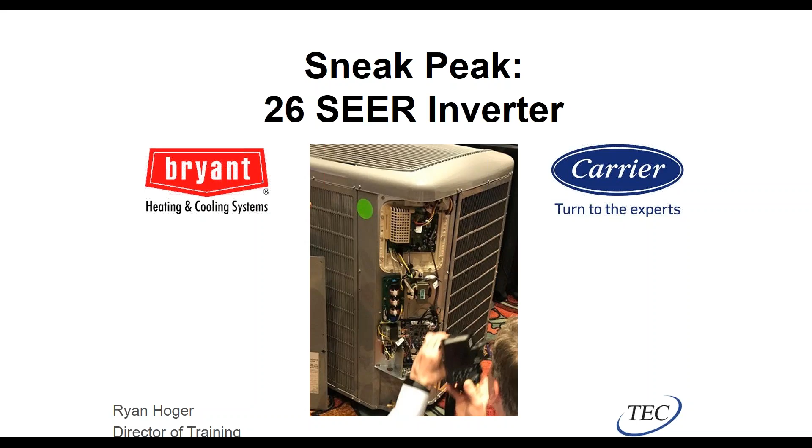So why variable speed to begin with? Well, variable speed is not new to us, we've been doing it for a while. I think this is year 9 of us having residential variable speed split systems. But the main primary purpose of it is to get better comfort. We'll explain why that is and how that evolves.

But your house does not see the exact same outdoor temperature every day. It doesn't have the same internal loads every day. Things are constantly changing. So why wouldn't you want the air conditioning system to match the loads as they change, to give you the exact amount of temperature and dehumidification comfort that you need at that moment in time?

So traditional systems, whether they're 1 or 2 stage compressors, are only right at full capacity at 2 moments in time, and that's when you're at 100% of design, which almost never happens. And then when you're on stage 1 of a 2-stage compressor, it's usually 67 to say 71% of full capacity. So at that moment in time, you're correct.

But instead of 2 stages, if you could have 4, 5, 10, 50, 60 stages, the more stages you have, the more tight your control would be. At some point with enough stages, we stop saying stages and just call it variable -- when I say we, the industry does that. I still tell the number of stages because that's what I like to do. But once we get above 3 stages, it's technically called variable speed compression.

We'll have better, tighter temperature control, lower indoor humidity for the reasons we'll explain as we get into this. And we'll actually have longer longevity -- that's a brilliant way to say it. We'll have longevity because we'll have less wear and tear on the components.

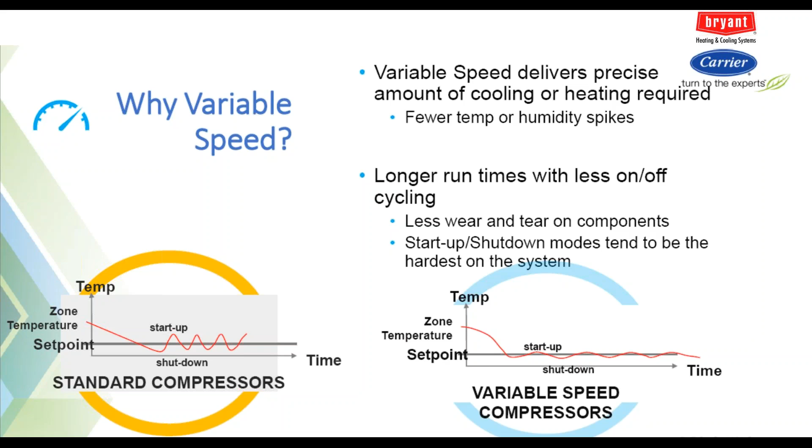The humidity control is actually a big thing as well. The more stages of capacity that we have, the less likely we have to turn the system off. And as you're probably aware, your system is only dehumidifying when it's actually running. So if you've got a fairly oversized system, like everyone in America, and it's only 1 or 2 stages, when it kicks on, the first 3, 4, 5 minutes, there's no condensate, there's no moisture running off your evaporator coil.

It takes time to get the evaporator coil down to the dew point of the air and then start pulling moisture out. But when you only have 1 stage or even 2 stages and you bang them on and it satisfies the thermostat pretty quickly and shuts right off, you didn't have enough time to get a decent amount of dehumidification. If you only ran for 5 minutes, you only dehumidified that last minute. So by having more stages and full variable capacity, we can keep the machine running and hence keep the evaporator coil wet constantly and pull more moisture out of the air.

The lower the humidity you can maintain in your building in the summertime hours, the higher the temperature you'll be comfortable at. Most of you guys, based on polling my live classes, probably keep your thermostat in the summer set on 72, seems to be average. Sometimes guys in class will say 70 or 67. I had one dude say 62 a couple weeks ago, which is crazy. My house, we keep it on 77, which may sound high, but it's not hot in my house at all.

My family is pretty warm in general. Three of my four kids are always complaining that they're hot. My wife doesn't really wear closed-toed shoes, she wears flip-flops in the winter. They're always hot. And at 77, no one is complaining at all because we do such an active job of dehumidifying the house.

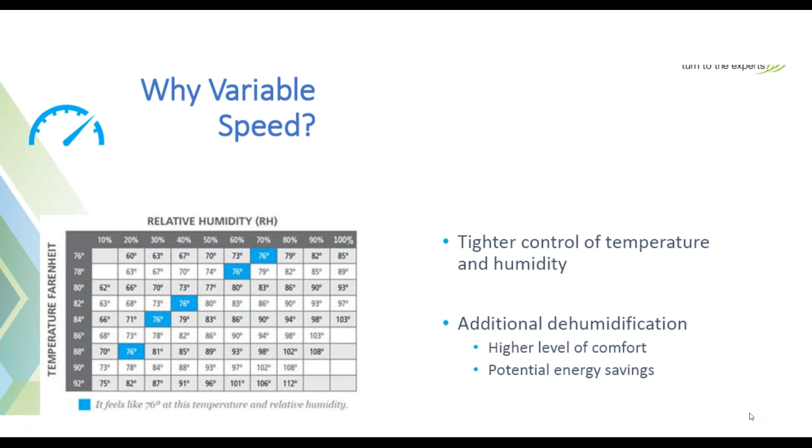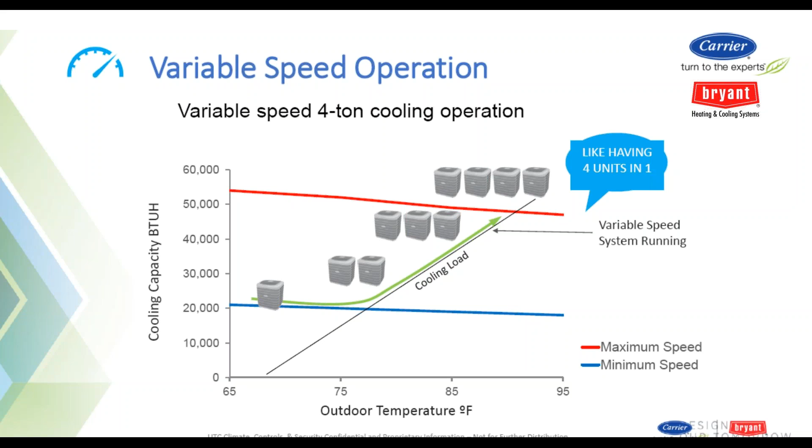You probably have seen graphs like this before because we've used them with other variable speed compression products we've had in the past, but this is one of the ways we explain it to consumers. If you just had one compressor, one condensing unit, it's on or it's off - it's not going to ever match exactly what you need. But if you had variable speed, or in this example, 4 stages of cooling on a 4-ton system, each stage being 1 ton, you've got a pretty good opportunity to match up the actual needs of your house. It's like if you had a big system, a medium system, a smaller system, and then a little tiny baby system, and you turn on whichever one you needed for that moment in time. That's the idea there.

Dehumidification, like I said, is huge. These systems can remove 400% more latent moisture from the air than any of the other systems that we have. We have a pretty low turn down on these new units that you're going to see - it's better than our 2 current variable speed products. So what I mean by that, we've had the variable speed Greenspeed systems since 2011 on the heat pump and then the AC a couple years ago. Those guys go from 40 to 100% in 1% increments.

Then more recently, maybe 4-ish years ago, we came out with the smaller inverter unit, which we also call the 5-stage unit. That guy has a better turn down - he goes down to 25%, but he only has 5 stages. So we have a 5-stage that goes down to 25%, and a 61-stage that goes down to 40%. The new one we're going to show you today is better than both of those.

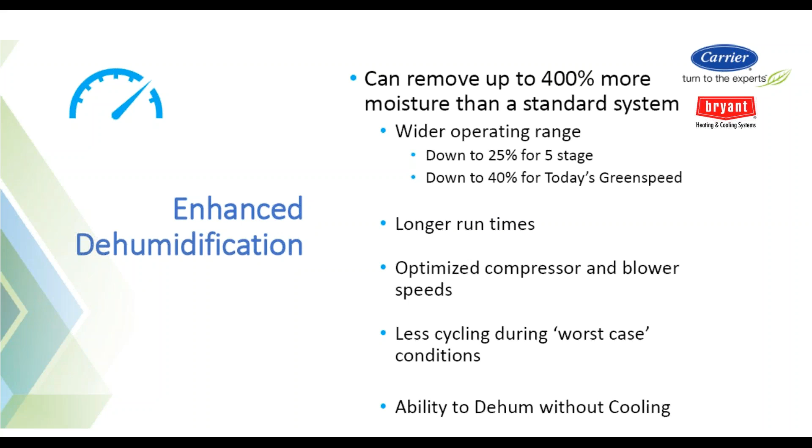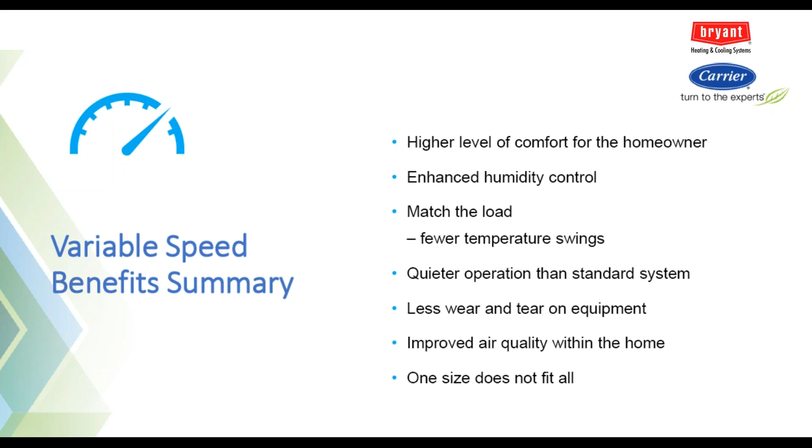The more staging capacity we have, the longer run times, optimized compressor, dehumidify without cooling is functionality that we have. We can do all those things you're used to doing on these really high-end systems we've worked with you guys on in the past. We're trying to match the load exactly for the customer - one size does not fit all. We can improve the humidity, improve the air quality, improve the temperature, be ultra quiet in that process. So we'll get on with that so you guys can see exactly how that works. Like I said, it's not new.

In 2011, we started doing variable speeds, traditional split systems with Carrier and Bryant, and it's kind of grown from there. We've had one in our Melrose Park lab since 2011, and obviously we have them in all of our labs now as well. This new unit that we're going to talk about today, the process to develop it actually started in 2016. That tells you the R&D cycle of some of these projects, for the engineers to develop this technology and figure out how to do everything the way they want and come out with something better than they came out with 5 years earlier.

So that's a 4-year process in this case to take it from birth to actual production of the product, which should come out here in the next month or so. My fingers are literally crossed as I'm telling you that. The way the country is going right now, I don't know how fast things are going to start shipping around the country.

But when they look at these processes, we've had some issues with some of the 61-stage inverters in the past when they first launched, the growing pains, if you will. So they looked at all that warranty data. They did all the what we call voice of the customer, where we, meaning the factory, talks to a large quantity of contractors that have had issues. Say, hey, what do you like? What do you not like? What went wrong? Why did this happen? And they try to collect all that data and then say, hey, what can we do to fix all that stuff? Because we want to launch the next thing without any pain.

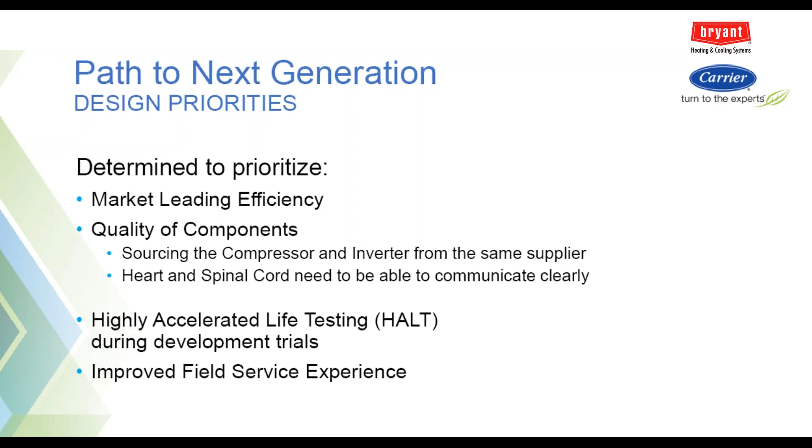They specifically have this chamber that basically beats the crap out of stuff. So they stick stuff in the chamber, whether it's the inverter that they're coming up with or the circuit board or whatever it is, and this thing shakes it to death and cooks it and freezes it and slaps it around, gives it really, really crappy power, and then they see not only if it's going to be able to survive for a certain amount of time, but they just keep testing it and testing it until it eventually fails, which is kind of unique. It probably is a really fun job to have. You just get to break everything.

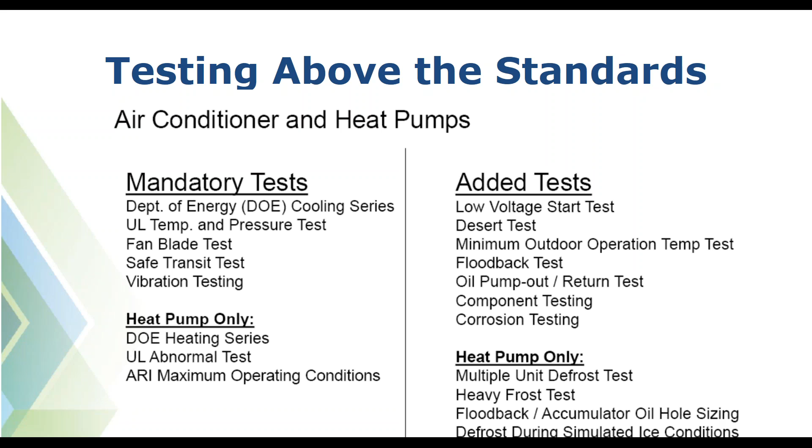But they keep testing it until it fails, find out which piece failed, make that piece better, test it again, test it till it fails, find the broken piece, fix that, keep on going until you've got most of these pieces being very durable. So they do all kinds of testing for Bryant stuff and Carrier stuff that's well beyond what the regular scope of the standards would include. And this is just a list of that stuff that they do on the equipment that they don't have to do, that they choose to do.

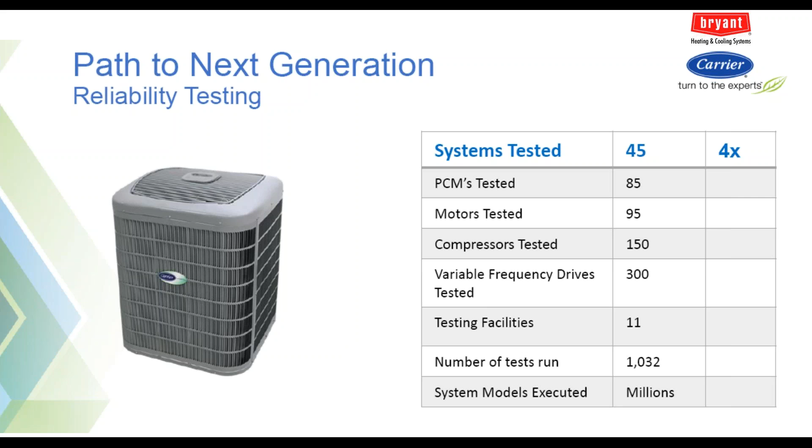In the case of this new unit that we're talking about, this just gives you an idea of some of the components that were tested before they even came out with the beta units. So how many units were tested, where they were tested, VFDs, which are the inverters. They tested 300 different ones, 300 different tests they ran on different units to test that out, just to see, because that's a concern, because that's the most expensive piece in the thing, obviously. So they want to make sure that that's all functioning correctly.

The SEER, as you probably know, is up to 26 SEER on the cooling models and 24 SEER on the heat pumps. You guys know the deal with the up to, right? We'll explain that again for those that don't know, but we'll go into that in a little bit. It'll have better dehumidification than the previous product, and better dehumidification than any other product in the market.

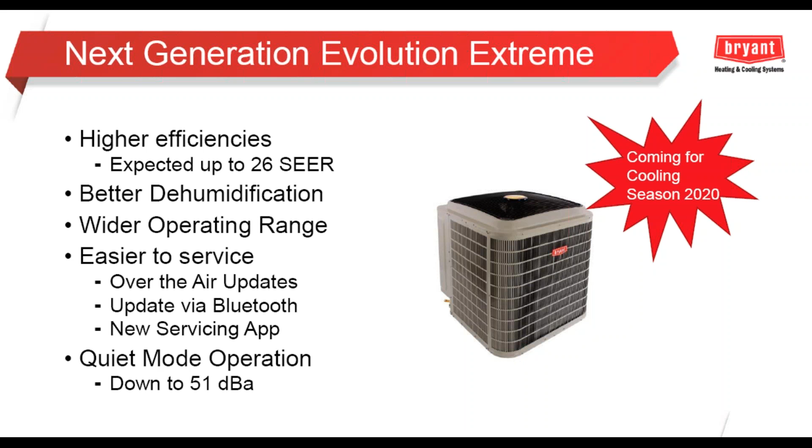We'll have a wider operating range than we ever had before, and lots of features coming on the service side to make things even better. And then my favorite thing is it's even quieter than anything we or anybody else has. It is freaky quiet, and we'll explain that for you guys too.

Like I said, on the Carrier side, it's called Infinity Green Speed, so you should be used to those marketing names. The cabinets, you'll probably notice, are physically the same cabinets that we had on the old ones. It's all the stuff inside that's physically changing, and there's lots of stuff changing, but the cabinets and the visual look are what you guys are used to on the current product lines.

So what's the lineup going to look like once the new units come out? The 21 SEER will phase out for the AC, and the 20 SEER on the heat pump side will phase out, and it'll be replaced by these 26 and 24 SEER models that we have highlighted in red.

So on the Evolution or Infinity side of the equation, we'll have the same basic lineup. We'll have the single stage Infinity Evolution, which is stupid—don't anybody buy that, I don't know why you would buy a high-end thing and only get one stage. Then you have the 2-stage models that we have had in the past. And then you have the 5-stage inverter, 24 VNA9 and 189 BNV.

And then we have these new ones. So on the Carrier side, it'll be 24 VNA6, where the 6 stands for 26 SEER. That'll be a little bit confusing because historically a 6 means 16, but now the 6 will mean 26 SEER—we've surpassed the 20 number, right? And on the Bryant side, it's the 186 CNV model number.

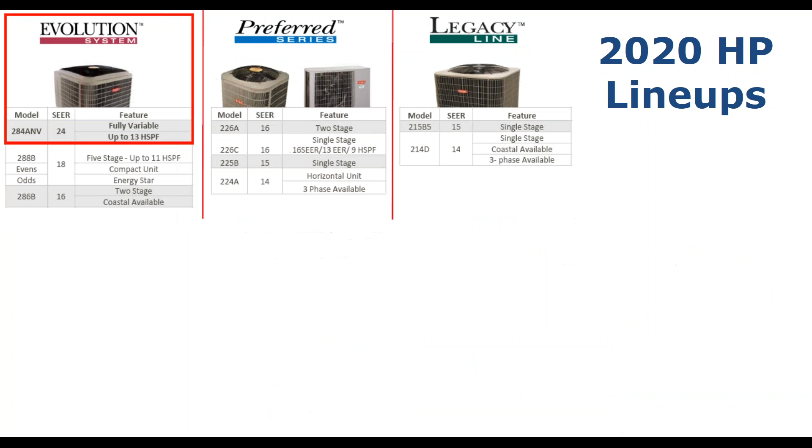Heat pumps, same kind of story—those go up to 24 SEER. I know we don't do a ton of heat pumps in this market, but we do a fair amount here in the greater Chicagoland area and Northwest Indiana. But those will be the model numbers you'll have for the heat pump side.

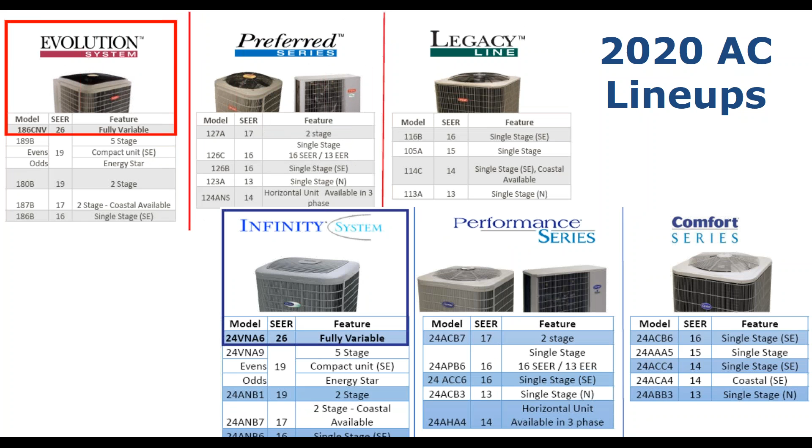For Carrier, heat pumps always start with 25, so 25 VNA4. By the way, the V means variable compression, N means infinity—we don't use I for infinity because I's in model numbers suck. So 25 variable infinity A version 4, 24 SEER. And on the Bryant side, the 2 at the beginning of the part number means it's a heat pump, whereas the 1 meant it was a straight AC. So 284—8 means Evolution, 4 means 24 SEER, and so on down the part number.

So some of the ratings you're going to see on these units when you look on the AHRI directory—obviously the rating is a function of the condensing unit, the evaporator coil, and the fan system, meaning fan coil or furnace. So you'll have different ratings for different combinations.

And like all other products we've had in the past, and all the competitors' products, when we say it's a 26 SEER unit, that means up to 26 SEER. Just like right now, when we say it's a 16 SEER unit, it means up to 16 SEER—certain combinations will hit that, some won't. Usually it's easier to hit these ratings on the fan coil side and on the 80% furnaces. The 90s are a little harder to get the high SEER because of the restriction of the heat exchanger, the second heat exchanger, to push air through.

But what I want to point out on some of these ratings—there's two things actually. One is not only is the SEER rating pretty high, the EER is pretty high too, which compared to our 5-stage units is a big plus. The 5-stage units are really small, really compact, have nice high efficiency—19 SEER in those cases—but they don't really have great EER.

It's not a big deal usually because high EER means you're at full load, and full load almost never happens, so who cares? But if you stick around to the very end of this presentation today, you'll see why high EER is going to matter again, and why you're going to want to look at this unit.

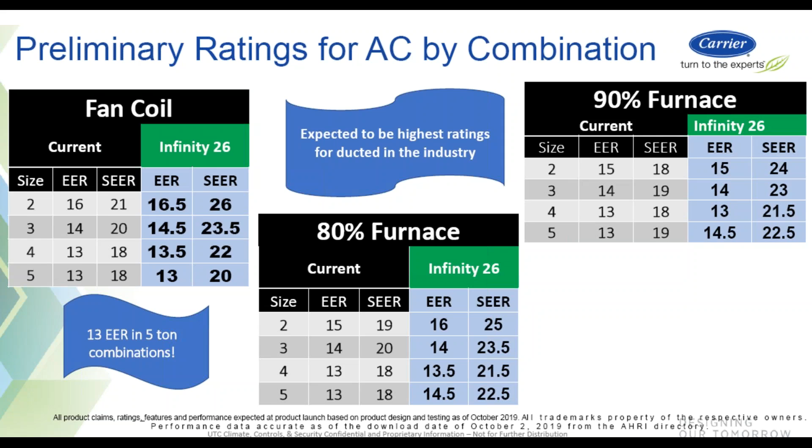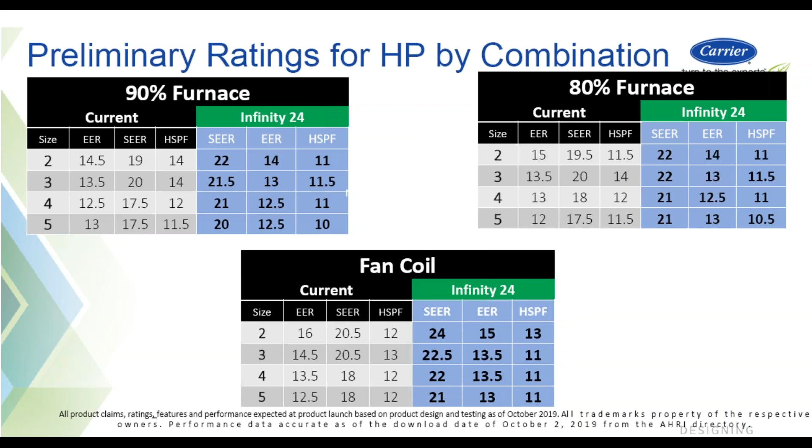So the 5-ton unit I mentioned is different than all of the other units. The 5-ton has a brand new feature called vapor injection. This is not something anybody else has had in the past—I'm sure eventually they will, because that's how things go. But that's going to be the big difference here on why we can have the 5-ton be so much more efficient than we've had in the past, and even more efficient than the 4-ton model, which is crazy.

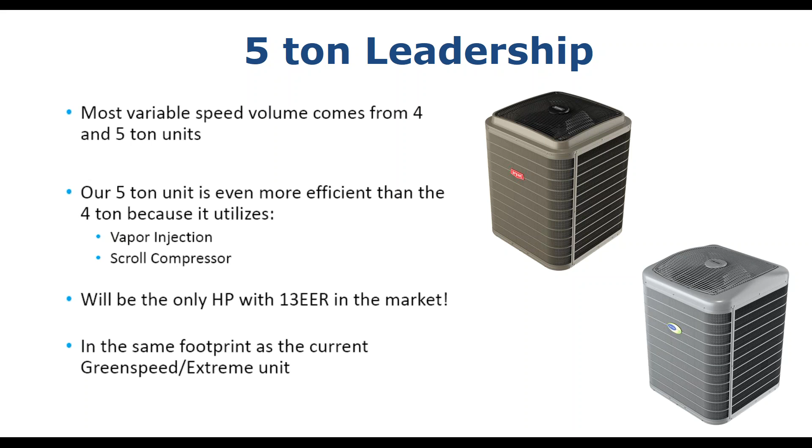Generally what we do is put the 4 and 5-ton in the same unit and just overspeed one and underspeed the other, but that's different in this case. So we get some pretty high efficiencies here.

So here's the quickie version of how this vapor injection works. There's an extra piping route on here, if you will. So if you follow along with me, we put numbers on here so you can try to follow along, since I can't physically show you one in the lab today.

What we're going to do is, coming off of the condenser coil, we're going to grab some of that subcooled refrigerant, not all of it, just a portion. That subcooled refrigerant, we're going to pull it off into a separate line, and it's going to go through an expansion valve, which is obviously going to force the pressure to change.

And as you know, PV equals nRT, so when we change the pressure, we're going to change the temperature of that fluid going through and transform it into a liquid vapor mix, then it passes to the heat exchanger where we can cool the other refrigerant that didn't go through there, if you will. Then we send it back to the compressor and inject it back in again.

And in yellow there, the rest of the refrigerant goes into the house to the rest of the system. In blue on the top right is where the refrigerant is coming back from the house. There's going to be more details as we dive into this.

We also have a video that we're going to share with you guys as soon as the factory says we can release the video to explain how this works. And then obviously we're going to have technician training for this because it's different.

Anytime there's something different, you can't just throw it out there because people will freak out. So we have some additional training coming to help with the technician side of the equation. But this is the reason why we're able to get to that higher efficiency level with the 5-ton unit.

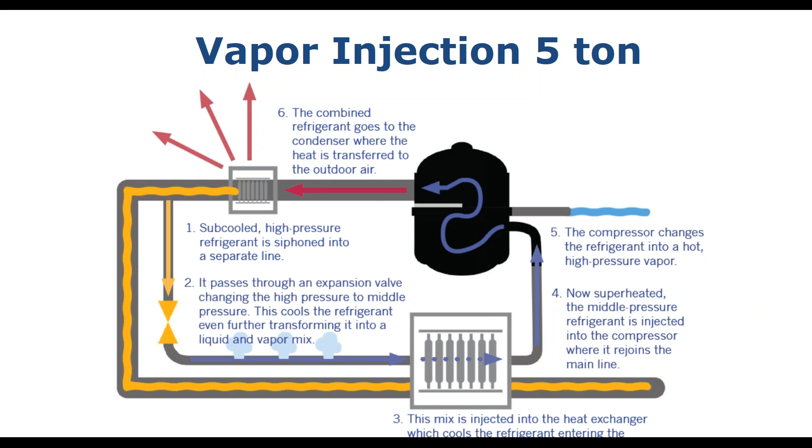I mentioned the dehumidification being better than standard systems, and it's even better than all of our previous systems. Compared to a traditional 13 SEER single stage unit, it's 400% more dehumidification than we had. Compared to the normal test conditions for the AHAM, it's 70% more removal. And compared to our current Greenspeed unit, the quote-unquote 6-stage unit we've had since 2011, it's 30% more than that.

And that guy was a beast. He was a good dehumidifier. I'm saying it like he's dead. We still got it for a few more months, right?

But it's a lot of dehumidification removal. If you put in a dehumidifier when you have this unit, there's definitely something wrong. In fact, if you did it on the old one, there's something wrong. You need to talk to me, and we need to figure out what's going on with your house. In our climate, you should not need a dehumidifier and a Greenspeed Extreme type unit. It's one or the other.

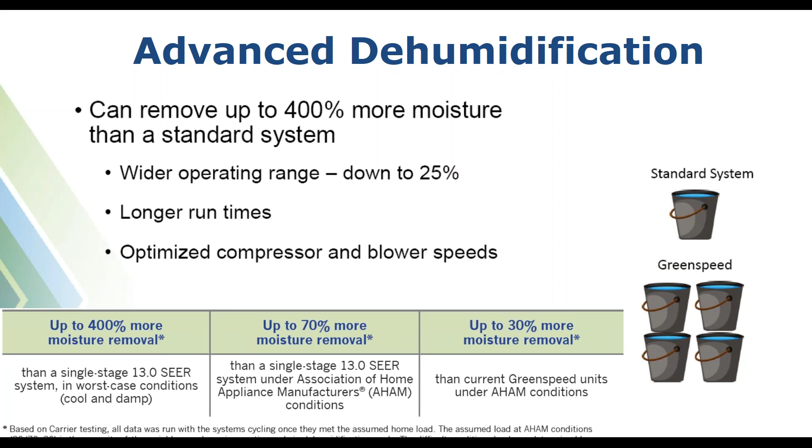The sound levels are another huge improvement on this unit, and some of the things that help out with sound we've had for quite some time. I'm sure you're all familiar with the forward swept blades, or as my kids call them, the Batman blades. I'm not sure why, because there's only 3 of them, but that's what they call it. We have those same forward swept blades which reduce sound, and it has that silencer top where the shroud curves inward, which also helps reduce sound.

We have compressor blankets, which a lot of manufacturers use to reduce sound. We still have the split post grommets for the compressor base. Think of it this way: there's a post on all 4 sides of the compressor, and that post does not go into the bottom of the cabinet. It goes into a rubber grommet, and the other side of the grommet connects to another post that goes into the cabinet—like a little mini shock absorber. We have those 4 posts, shown in the bottom left corner of my slide, and the plate they're mounted to is laminated, so if there's any metal touching, you don't get that chinging noise—it's a laminated, flat type sound.

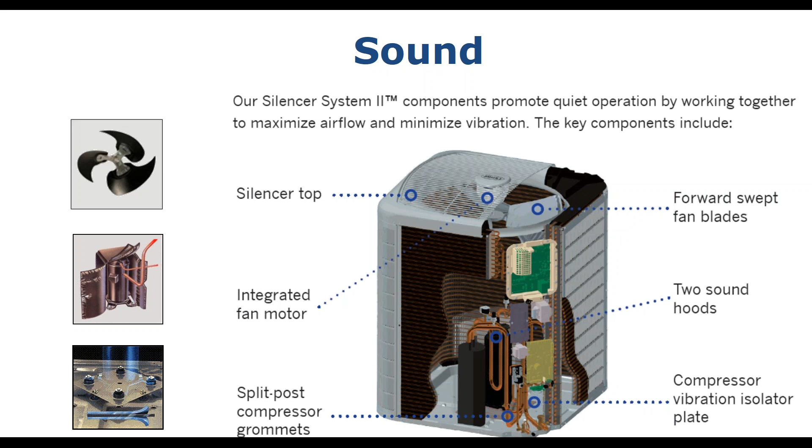That, combined with slower compressor speeds and slower fan speeds, all contributes to make this a pretty quiet unit. And by pretty quiet, I mean it's literally the quietest unit—you can't find a quieter unit than this. It's quieter than anything we have now, and we have stuff that's super quiet already.

I have some of my units in the training lab that I turn on for classes before the guys come in, and I have them running. As we're talking in the lab, they say, 'Well, let's hear this thing you've been talking about, Ryan.' I'm like, 'Dude, it's been running the whole time we're standing here.' And they're like, 'Holy crap, you can literally have a conversation and not even know the unit's on.' This unit's quieter than that.

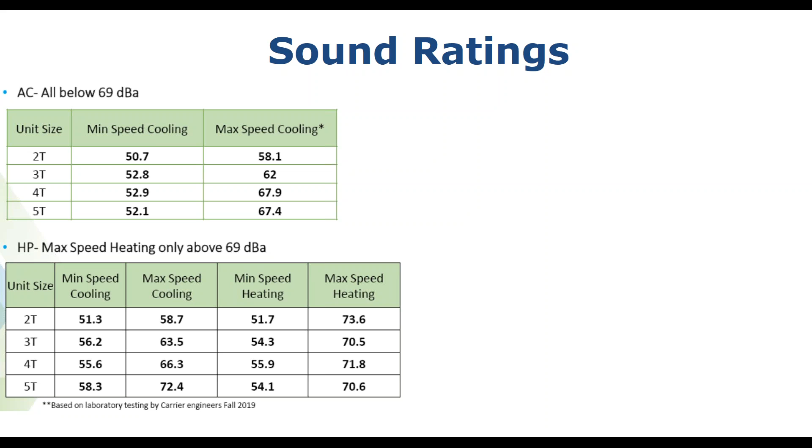It has lower dBA sound ratings. As you can see on the screen, the top is the AC, the bottom is the heat pump. For different modes, a typical 3-ton AC is going to be between 53 and 62 dBA for sound. What does that mean? 62, 52—I don't know what those dBAs mean, so I had to grab another chart to see where that lands. Normal speech is 60 dBA. So for the 2-ton, it's never going to be above your speech level.

The 3-ton basically gets to your speech level. And the 4 and 5-ton only get up to speech level when they have to go all the way up to full max cooling, essentially. This is a really quiet unit—on the low end, we're down in the 50 to 52 range.

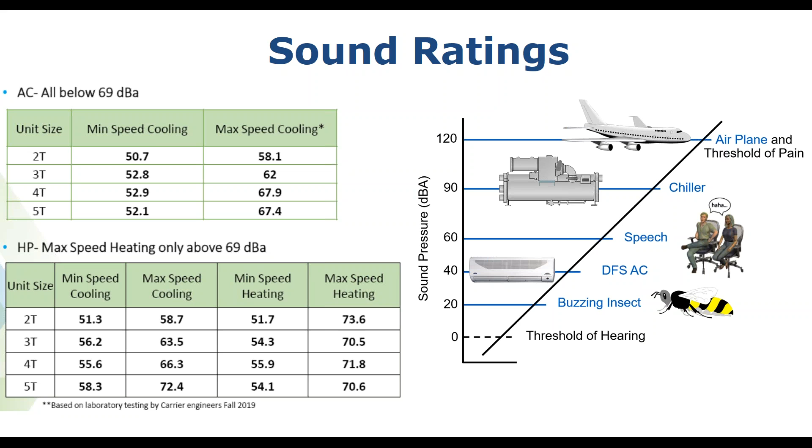That's barely more sound than the indoor unit of a duct-free split, and duct-free splits are really quiet. So this is really quiet stuff. You could put it on your patio and be out there with your buddies drinking - not that you would do that, but if you were having a beer or 17 glasses of wine, you wouldn't even know this thing kicked on. Your buddies wouldn't even hear it. It would just be making a little bit of airflow noise if they happen to notice that. So, very quiet.

There's also a quiet mode. I don't even know why that exists, honestly. I have the 5-stage unit at my house, and it is freaky quiet - imperceivable, you can't even tell it's on. So for this thing to be quieter than that and also have a quiet mode, I don't know why you'd even do that, but it's on there. If your unit's right next to your bedroom window and the slightest sound annoys you, you could put it in quiet mode manually and limit it down. You do lose some capacity, but it's not that much of a difference.

Oh, finally somebody typed something in. I was hoping you guys would type some questions, but you guys are so boring - you haven't been doing it. But Mallory types in, who can hear anything after 17 glasses of wine? I'm not sure, Mallory, you'll have to do some experiments this week. Send your test data to me after you've tested it out. Anybody else, type some questions in and we'll try to answer them the best we can.

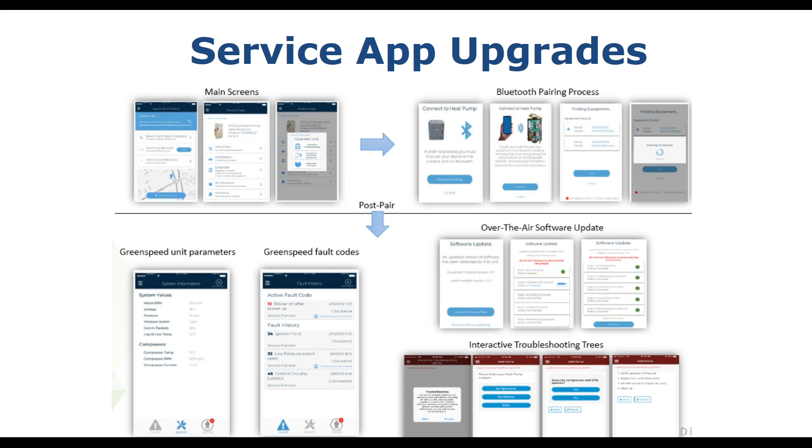Now, what's going to happen on these new inverters is they have Bluetooth in them. As a technician, you'll be able to take your service app into someone's yard, sync it to the unit with Bluetooth, and interrogate the unit for data. So it's more information than we ever had before. You already get a lot of data on Infinity and Evolution stuff at the thermostat, but these units will have significantly more data available, a lot more codes, and by the way, the codes all come out in plain English, which is nice. Now you can get it while standing next to the condensing unit without having to walk back inside to the stat - you'll be able to see everything while you're standing there. So you'll see more information on that coming out too.

I'm going to give you a couple of quick slides just to get you going. You'd have to pair your technician app, your phone, to the piece of equipment you have. It's no different than pairing your phone to your car for Bluetooth - you say I want to pair it, it says confirm this is the one you want, yes it is, click pair, and then it goes and connects. It's pretty fast, under a minute to pair.

After that, you can see everything the unit has going on with it. You'll see all the fault codes that are available, unit parameters, what RPM it's running at, what the voltage is, what the refrigerant pressures are, compressor temperatures, compressor RPMs. You're going to have all that kind of data available to you, as well as any fault codes that are happening, and you're probably there because there's a fault code. Otherwise, why would you be there? So all that kind of stuff is going to be available to you.

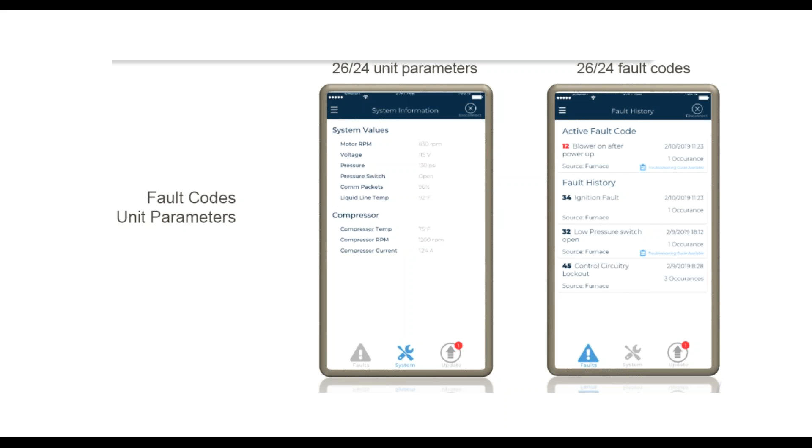Jay asks, can I update the software without being at the Infinity wall control? Yes, you'll actually be able to do that. You're like one slide ahead of me, Jay. You're obviously pretty smart. So yes, you'll be doing the software update that way.

So a couple different things. Right now we can do software updates on the Infinity and Evolution wall control itself, the thermostat if you will. But we can't really update the circuit boards in the condensing unit outside. Whatever version of software you have is what you have. If for some reason you ever needed a newer version of software, had some weird problem that only happens in your town, and you needed that, you would basically take that circuit board out and put a different circuit board in, which is obviously a pain.

Now what you'll be able to do from the app as a technician is download from the internet the current software into your app and then push that software into the condensing unit circuit board via Bluetooth. So if something happened, like you needed a new feature or there was some quirky thing and you thought the new software would solve it, or tech support said get the new software, you could push it in right there while standing in the yard without having to touch any wires and do anything like that.

There's also troubleshooting trees. Some of the products already have this, not just this new inverter. Some of the other ones have it too, some of the new furnaces. And you're going to eventually start seeing this on more and more products that come out from Bryant and Carrier.

But these troubleshooting trees are kind of like a step-by-step guide. You pull the tree up on your service app and tell it what unit you have, or scan the unit. And then it'll say, what are these problems that you have? You click the one that you have and say, okay, I'll check this. And you check that and click the next thing. And it kind of walks you through the troubleshooting until you get to the broken piece.

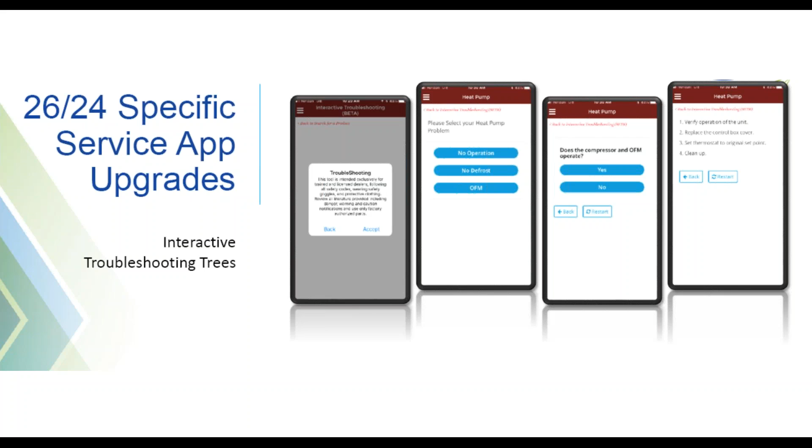Breaking news, John just texted in that the Bears traded for Nick Foles. I don't know if John's joking with us or if that's true, but either way, breaking news, right? John was a reporter in a former life.

So some of the features on the app that are specific to the 26 SEER unit that's coming out: Bluetooth pairing, over-the-air updates, display all the fault codes of the unit, display all the current parameters of the unit, and interactive fault trees where you can walk your way through there.

This should make it easier for the technician. You can do some basic stuff without even having to get into the unit. 145 diagnostic points - I forget how many we have on the current Greenspeed, but I want to say it's like 40 something. So this is significantly more things being checked, maintained, monitored, and babysat, trying to make it a little bit easier for the tech. Yes, it's a more complicated piece of equipment, but if we can make it easier to service, that kind of goes away. Kind of like the Infinity Evolution stats - they're doing tons of stuff, way more than a regular stat does, but it's super easy to install them. In fact, most of the guys that come to class tell me it's easier than a regular stat.

There's like no thinking. Wire these 4 wires, and it just does everything else on its own. It's kind of like that. So yeah, it's more complicated, but it's also smarter, and it makes it easier for us.

We have a second confirmation that Nick Foles is now on the Bears. I don't know why I'm reading the things you guys type in. I must be an idiot, but keep typing in weird stuff and I'll probably keep reading it.

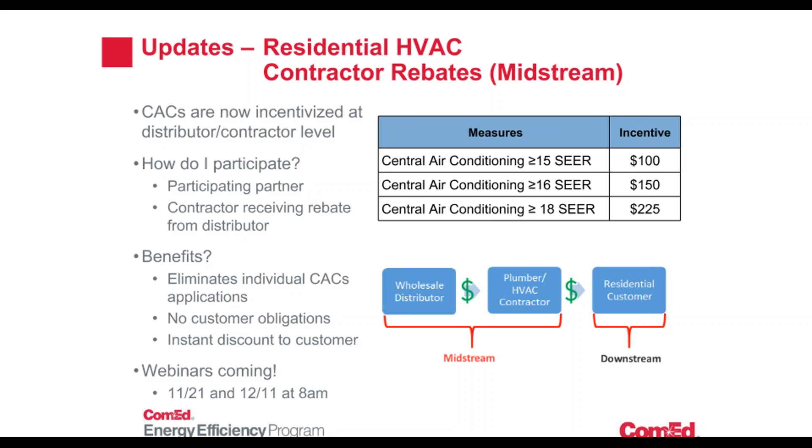So you could potentially be getting $300 off the federal tax credit, which people obviously have to wait for to get their money out of that deal. And then combining that with the $225 from ComEd, you could be getting $525 off of the system when you go ahead and put this type of system in.

Coming up, some things we have for you.

April 3rd, the head of our tech support group, Doug Bear, is going to do another webinar similar to this, although in much more length and depth, regarding the installation and setup you need to do on these new systems. That was something we were going to do as a live class later in April, and we're still going to plan to do that. But with things being the way they are, we wanted to get it done in a webinar, at least in a preview format. In late April, early May, or whenever we're allowed to have large gatherings again, we'll resume those live in-person classes with you guys. Mark that down on your calendar for your service manager or even your technicians to check out that webinar with Doug.

You will be required as a Bryant or Carrier dealer to get certified, trained by Doug or one of the other guys in his department, in order for your dealership to be able to sell and install these. Some stuff's going to be the same as what you're used to, but some things are different, especially the 5-ton unit. We want to make sure everyone knows what they're doing. Not that you guys wouldn't figure it out, but we want you to do it the easy way, come to class and learn before we throw you out in the field to actually install these things. Make sure we have a good launch.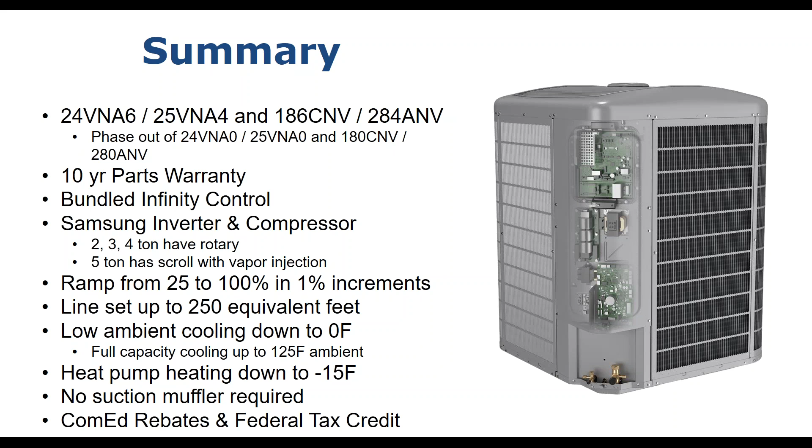So that takes me to my closing here. Does anybody have any more questions? If I missed any of your questions, I apologize—there's a whole bunch here and I didn't get through everything, I don't think. Some of your questions are more install/service related, so I'll have you get those answered when you log into Doug's webinar in a week and a half.